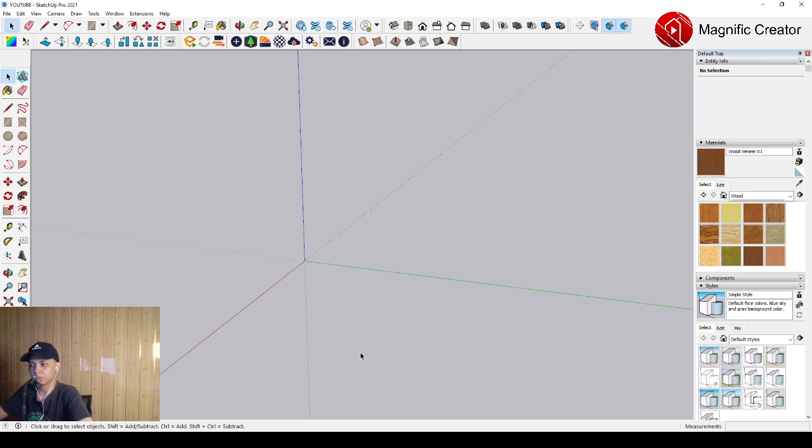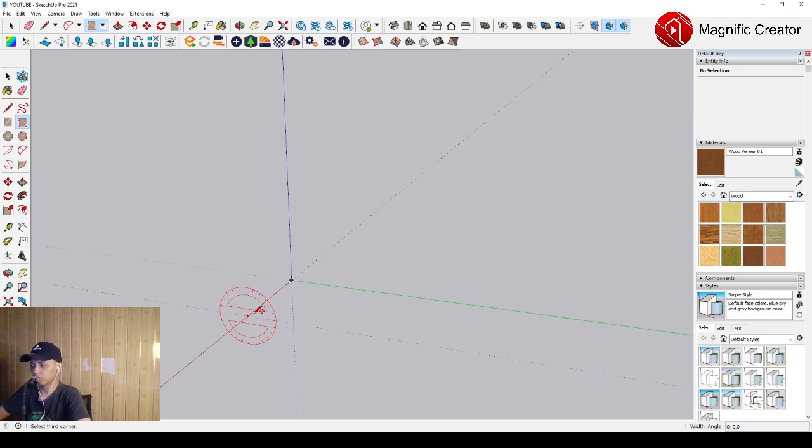First, we have to make a basic shape with a rotated rectangle. We can start from here, set the length around 500, and the height around 500 also. Type 500 for the length and press enter.

We have to push it up around 40 millimeters. Then make it a group. Then we can move it to the upper position, around 450 millimeters, something like this.

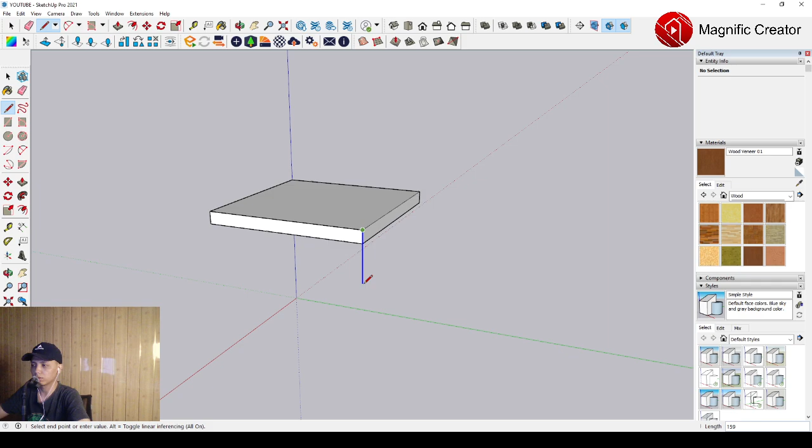Then we can set the support, the elbow support, with the line. Start from here, through this corner, and end at this position. Then we can click it all.

Then we can offset it inside, around 80 millimeters for example. Then we close this and complete it.

This is the frame support. We set the thickness around 50 millimeters, then make it a group.

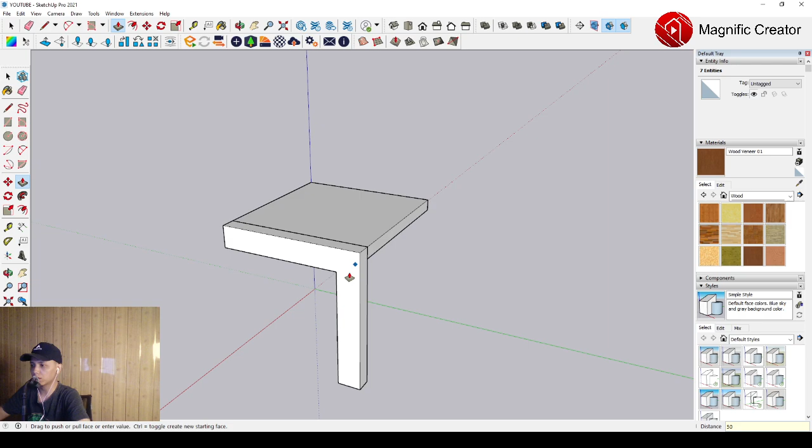Then we can make another support in this position, using the line tool. Start from here, through this corner, and to this corner.

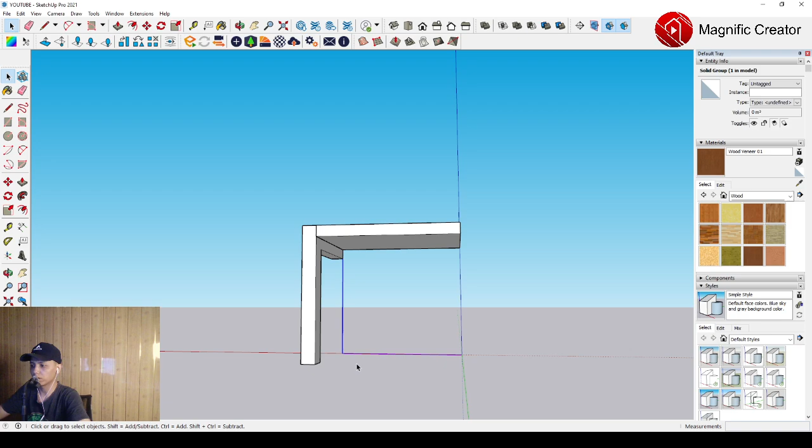Then we have to offset it inside around 70 millimeters approximately, and close this to complete the line as usual.

Then we can push it to the front around 50 millimeters. Then make it a group, and move while pressing Control.

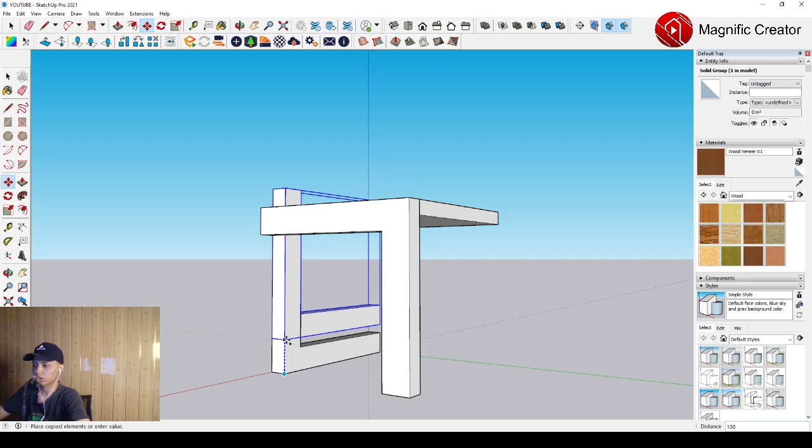Then we can flip it along the blue axis, and push it to the other side, around 100 millimeters for example.

So then we can make another support here, using the line tool, starting from here, and then placing it on this position.

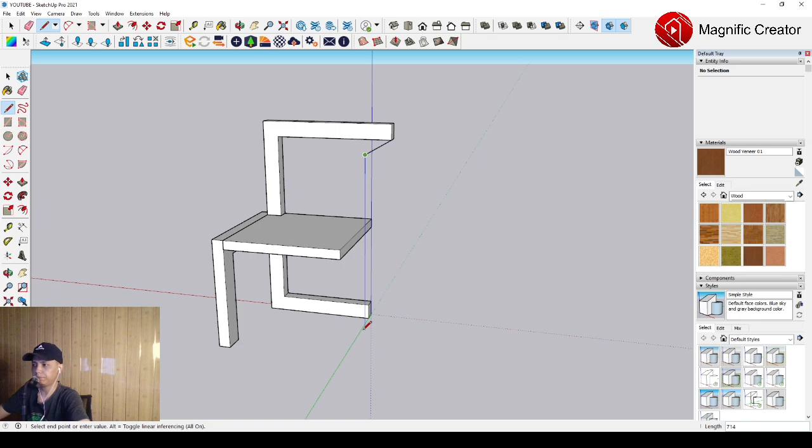Then we can click both of this line, and offset it inside around 50 millimeters. Then we close this to complete the line.

Then we get the shape of this elbow plane, and push it to the left until this limit, until it touches the connection, and then make it a group.

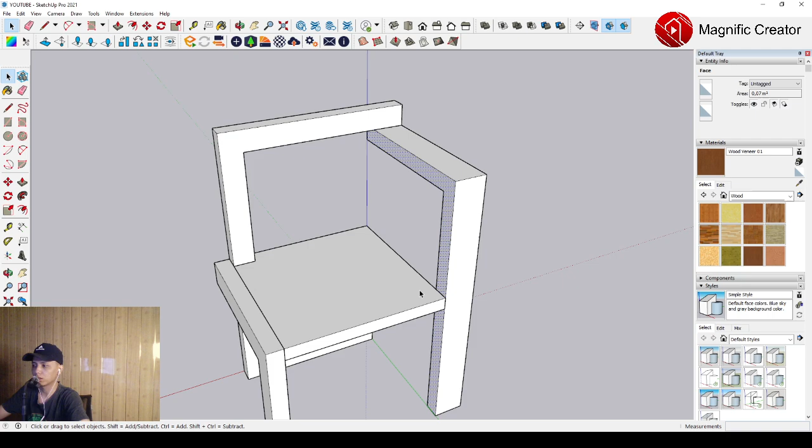After that, we select all, make group, and assign it with a synthetic surface material. We can use formica laminated light, which I suggest because it looks more aesthetic and representative of the chair.